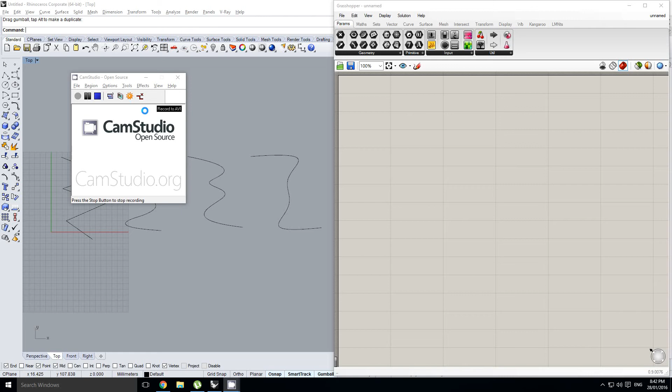Hey guys, this tutorial is going to be a look at some of the fundamental concepts of geometry in Rhino and thus what we have access to in Grasshopper. Now this tutorial will explain things that are good to know if you're using Rhino, so it's not a Grasshopper specific tutorial, but I will be explaining some of it in terms of Grasshopper terminology, so feel free to follow along if you want, otherwise do what you want.

I should also note that you don't necessarily need to do anything in this tutorial. This will be just me explaining some fundamental concepts, so you don't need to actually have your Rhino and Grasshopper open if you don't want to.

Alright, cool. So without further ado, the main type of geometry that you work with in Rhino is called NURBS. And NURBS stands for Non-Uniform Rational Basis Spline, or a B-spline. And so these are just a specific kind of geometry that were discovered in, I don't know, between the 1950s and 1970s, and they're governed by an incredibly complex set of mathematical equations far beyond my head, but we don't need to know all of that to understand how they work. I'm just going to explain to you what you need to know.

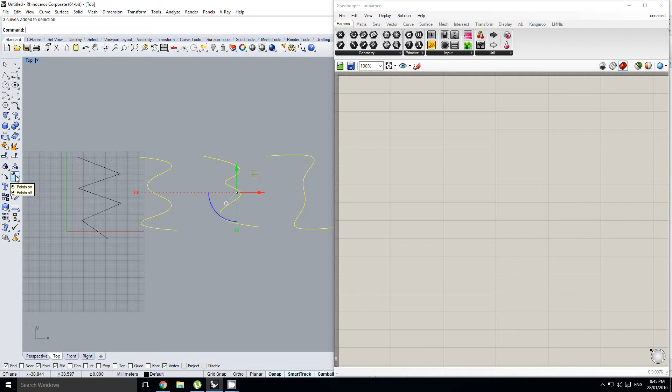And so the degree can be basically any number. Generally you'll get either a degree 1 curve, a degree 2 curve, a degree 3 curve. You can get a 4, although they're not really used that widely, or this one is a degree 5 curve, and so on and so forth. And so if I turn all of these points on using the points on command, okay, so for a degree 1 curve, the way that I like to think about it is if you move this 1 point, it only has 1 point of influence. It won't do anything to any geometry beyond either of these points.

If you're meddling with a degree 2 curve, you'll have 2 sort of degrees of influence. So it'll manipulate any geometry tied to this point and also this one. A degree 3 curve will have 3 degrees of influence. So we're kind of getting influence on this point here, and a tiny bit bleeding into this point here. And then a degree 5 curve has 5 degrees of influence. So from this point to this point to this point to this point.

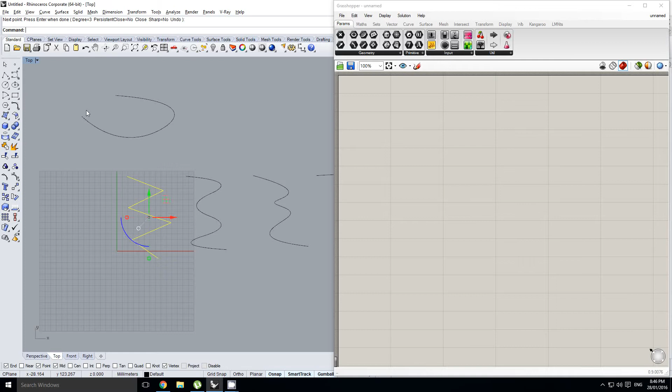And you'll notice that the higher the degree of the curve, the more sort of spaced out your points get, and that's just a factor of calculating a NURBS curve. The other really important thing to note about a NURBS curve, I'm just going to make another curve over here really simply, is there needs to be more points in the curve than the degree of that curve.

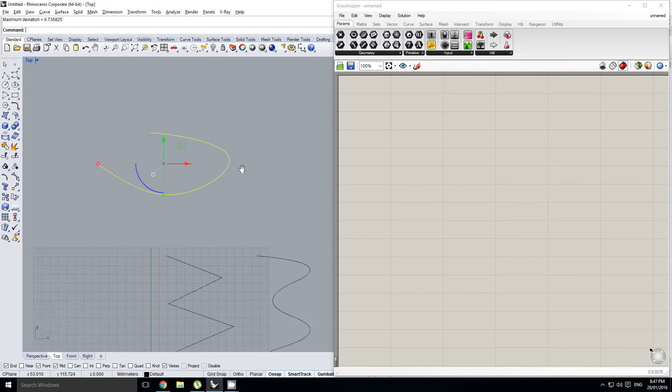So for instance, if I were to rebuild this curve, actually before I do that, I'm gonna cycle through the different degrees so we can see what's going on here. So this is the degree 1 representation of this curve. This is degree 2. This is degree 3. And so at degree 3, we sort of get the most natural shaping of that curve. And in general, degree 3 curves are the best curves to work with. I say best in a very loose sense of the term.

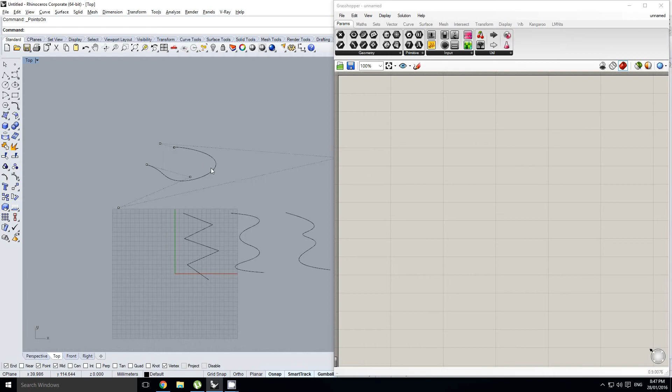Alright, we'll keep going. We'll try degree 4 and degree 5, and we don't really need to go beyond that. So you can see our points are going to get really spaced out. So we'll bring this back, sorry, to degree 3.

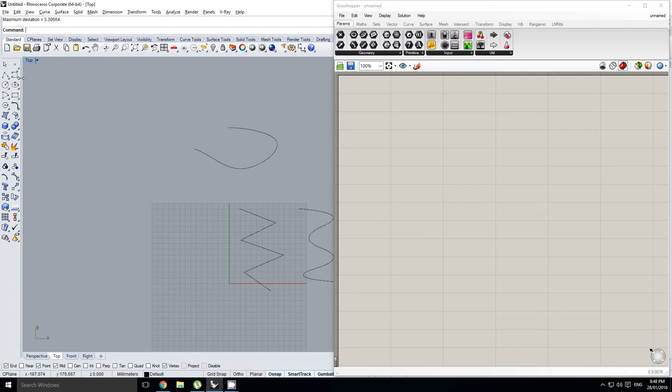Alright, now what else do we need to know about curves? It's really important how you space the control points of your curve out. And so for this we're gonna dive into Grasshopper so I can illustrate this. I'm gonna build a curve with 4 points.

So that's my first curve, and then I'll build another one with maybe a tiny bit of spacing over here, and then a whole lot of spacing in the middle, and then a tiny bit at the end. Then we'll do another curve with huge space between the first and second point, and then really small spaces between the third and fourth point.

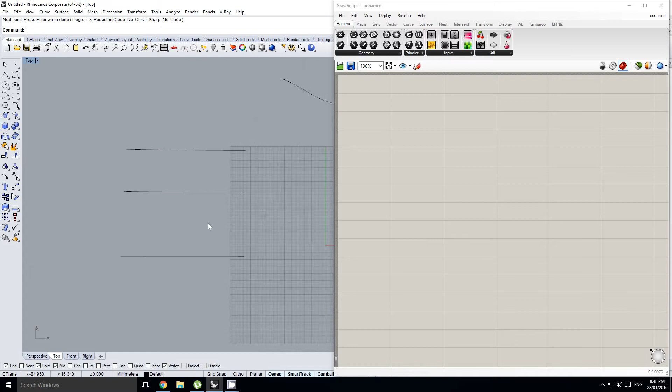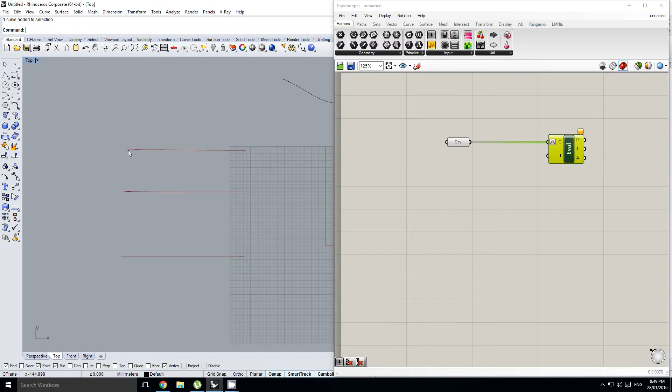Alright, now we're gonna bring these into Grasshopper as pieces of curve geometry, and I'm gonna set multiple curves. So 1, 2, 3. Now, as I evaluate these curves, you're going to notice something. Just remember we reparameterize our curves so that it turns our curve, whatever length it is, into a 0 to 1 space. So that way, if we're evaluating the reparameterized curve at 0, it's always going to be here, and at 1, it's always going to be here.

Alright, so we'll set this back to 0, plug it in. Now watch carefully what happens with this slider. In fact, I'll just turn the control points on so that you can really understand what's going on. Okay. Did you notice that? We get a very interesting result in the way the evaluation works along the curve.

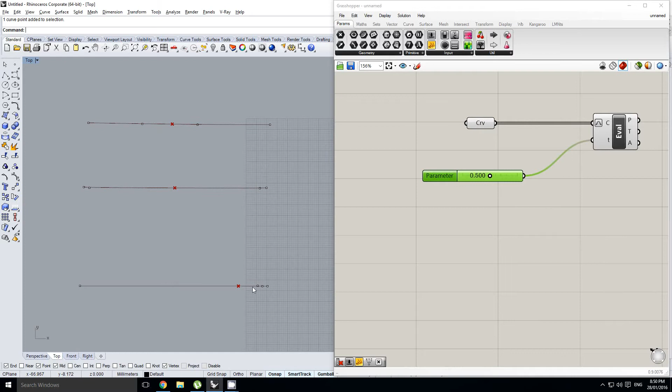Basically, if I'm going to evaluate it at 0.5, basically every single point on the curve has like a weight to it, and so the longer the spaces between the points, the more drawn the evaluation point will be to where there's more points.

So if we were to bring this to 0.25, you'll see our point on this third curve is pulled really far along this curve, whereas along this one it is probably about a quarter of the way along that curve, and along this one it's still dragged, still a bit retarded towards the 2 points at the beginning of the curve.

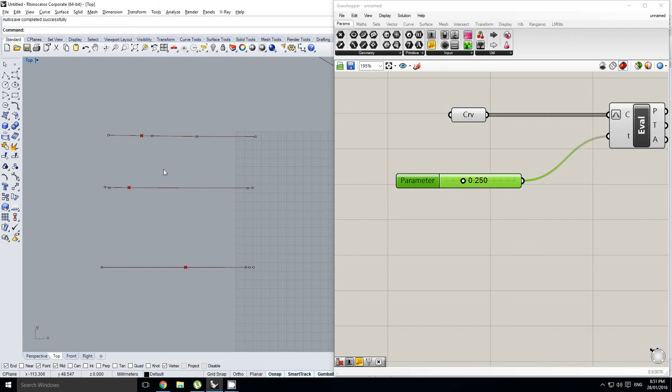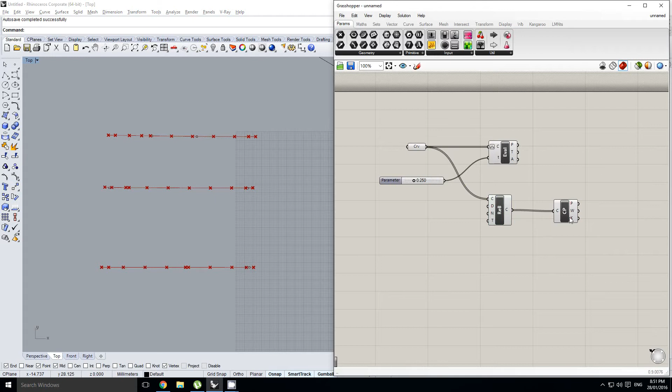Now, if you do bring your curves into Grasshopper like this, it's not too much of an issue because we also have the rebuild curve in Grasshopper too. And so rebuilding a curve before you manipulate it is really, really good to do. Because if we want to now grab the control points of this curve, you can see that Grasshopper's really spread them out a lot nicer.

And so we also have a couple of different parameters that we can control. We can control the degree of the curve, and we can also control the number of points. And if we want, we have some sort of control over the tangents of the curve as well. Alright.

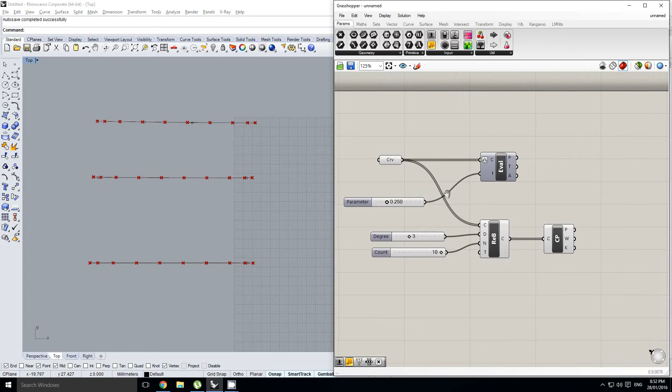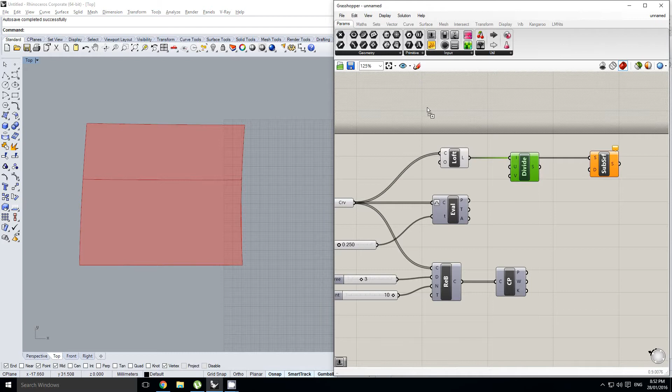So now let's look at what happens if we were to loft these 3 curves together. Okay, now that's alright, but that's not quite what I'm showing you just yet. If we were to take an ISO trim of this surface, and for that I need to use a divide domain squared. Don't worry about what these components are at the moment, that's not too fundamental to what I'm trying to explain.

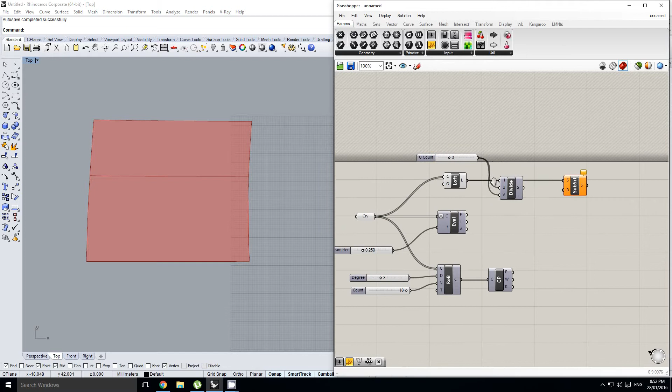Basically, we're going to look at how this surface is going to be divided up if we don't create our points properly. Or maybe you would want to do it like this because you'd want to achieve this sort of effect. Okay, so I'm going to turn the points on again, and you can see once again the point structure is really affecting how our surface is divided.

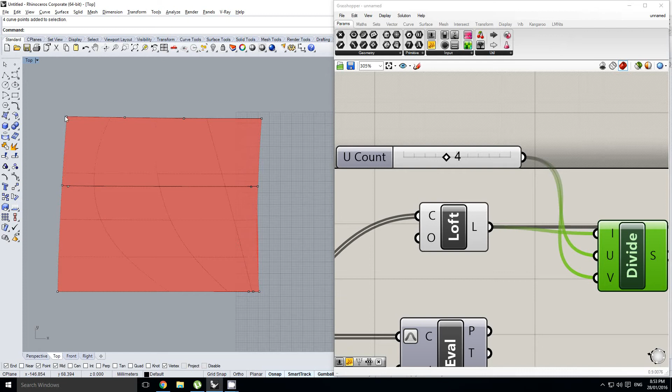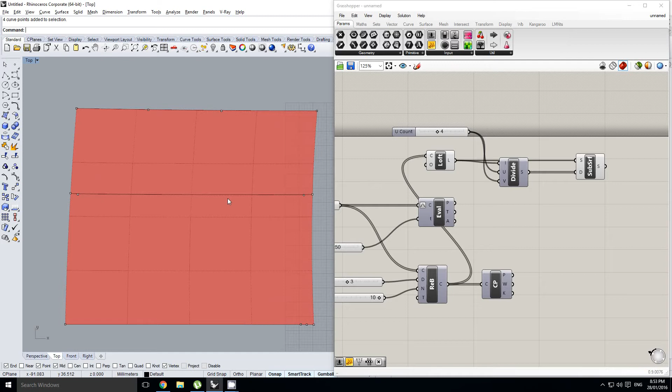It's really skewing the points towards these 3 points here on the third curve, and we're getting some really weird spans along here in the second curve, whereas in the first curve we're getting really nice spans between our 4 points. So if we were to put these rebuilt curves into the loft, you'll see what we get are really nice spans across our entire curve, because we've rebuilt the curves so that Grasshopper will now deal with them in a much nicer way.

Alright, so just like how curves have a degree value, surfaces also have a degree value, because surfaces are NURBS geometry too. So we're going to create a sphere.

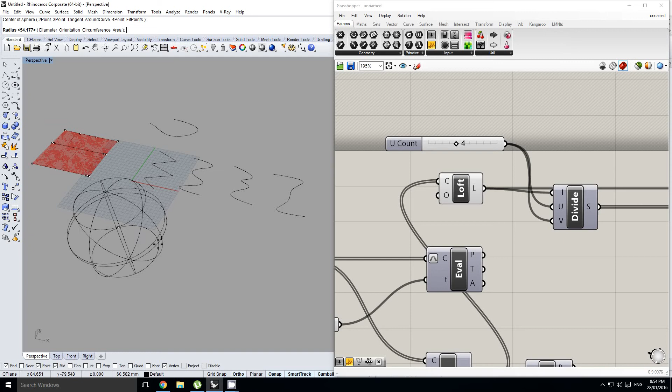I'll just drop that down. Okay, and so by default, the sphere is going to have a degree value of 2. But what you also notice is that it has a degree value in each direction, because a surface has a u direction and a v direction. And so by default it's set to 2. Oh, sorry, let me just undo that.

And we're going to make 2 copies of this. One there, and one there. And now we're going to rebuild this one, and we'll set it to degree 1. We'll rebuild this one, and we'll just leave it at degree 2, but we've changed the point count, so I just want to keep that consistent along all of my surfaces. And we're going to rebuild this one, and we'll make it degree 3.

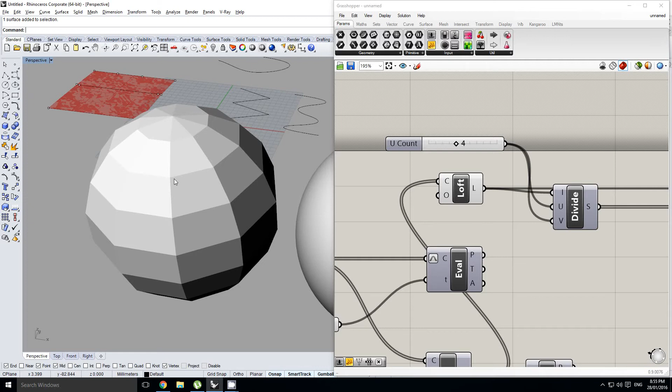Alright, so you might look at this and think, oh, that looks like a polysurface because it's composed of multiple different panels. Well, no, it's not actually. It's still a surface. And the way we can tell is because as soon as we select it, it tells us it's a surface. I'm going to explain the difference between polysurfaces and surfaces in a little bit more time. Alright, so degree 1 is always going to create this sort of faceted look. You saw the same thing with our curve, because each of these points have basically only 1 degree of influence, as I called it.

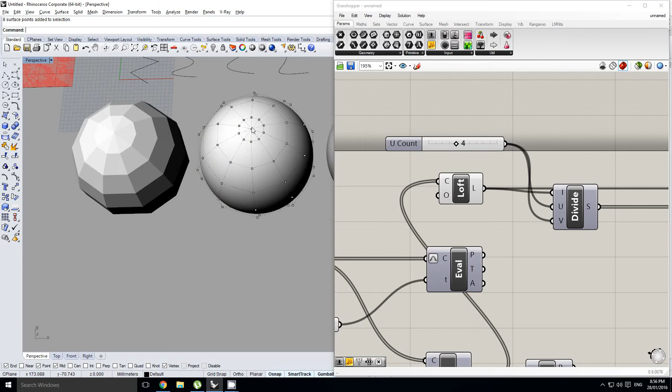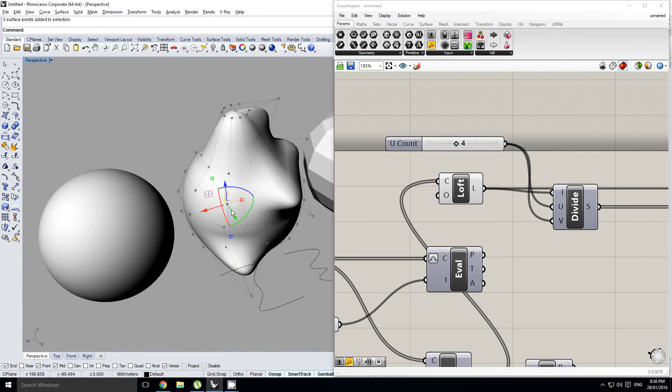Okay, so now if we were to take this sphere and we were to grab a whole row of points, in fact, let me just deselect those because I don't want those ones, and then we were to drag this out. Actually, hold on, let me just check what happened with that. Okay, so if I were to turn points on again, and let's see what happens if I just grab these. Okay, sorry, never mind, I just got a bit distracted there. Sorry, and I undid that rebuild.

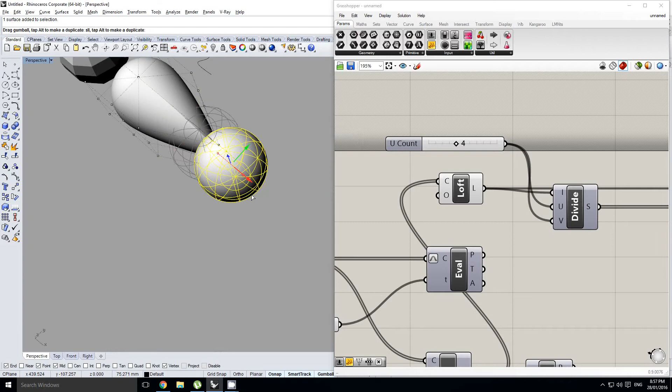Okay, so with this degree 2 surface, if we were to start pulling on some of these points, you might notice something, and that's that it gives us this really weird sort of harder edge, which is a result of the fact that it's a degree 2 surface. It's just going to do something a tiny bit weird, which is totally cool. In fact, if that's what you're going for, that's all good.

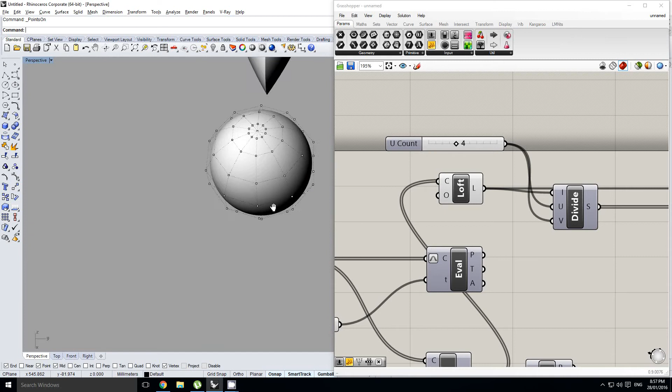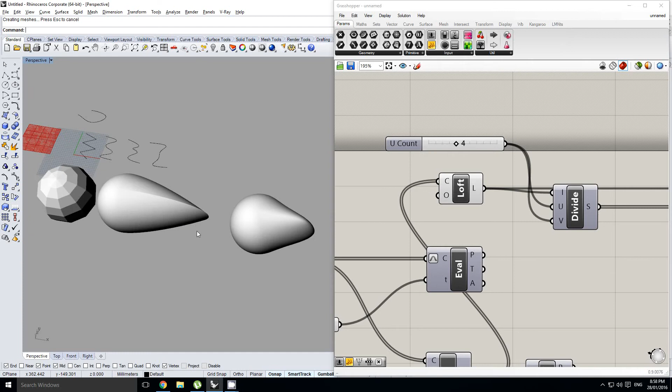But if we were to do the same thing with this degree 3 surface, let me just deselect those points and select these. Your degree 3 surface is always going to remain 100% continuous and clean and really nice. And this is once again because of the way we deal with curvature of geometry and the way that NURBS are constructed. Your degree 3 surfaces and curves are always going to look the most natural, be the smoothest, and just all in all the nicest to work with. Alright, cool. So I'll just undo all of that.

Okay, so now if we bring these surfaces into Grasshopper, actually I'll just bring them all in separately. Okay, so now we're going to use an Evaluate Surface component. I'm going to plug my surface in, and I'll do that 3 different times, and then I'll just use one multi-dimensional slider. Oops, and I forgot to reparameterize these. So we can, in fact, evaluate all of these surfaces along any point, or along any parameter along that surface.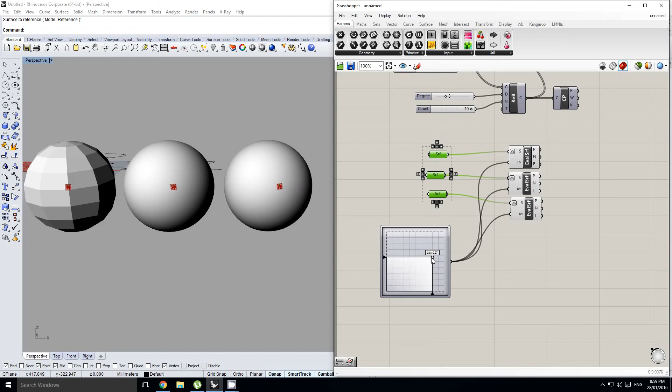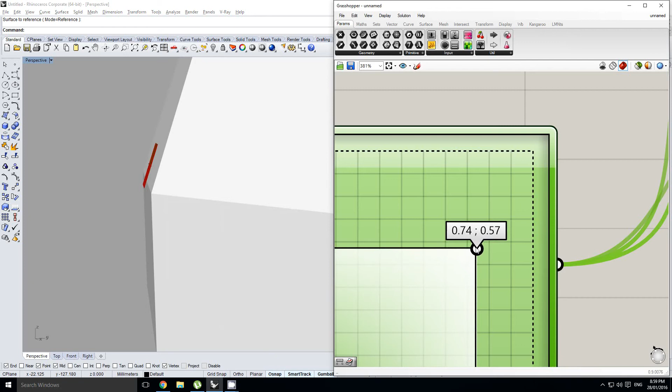You'll notice that as we sort of shift along the bounds of this one, it is going to give us very hard changes in the direction. So it's a very abrupt change along that edge, but it's still a surface, and all of these surfaces are going to give us nice smooth results as we pan around them. Now, just to explain something, I'm going to divide the surface using a Divide Domain Squared. In fact, did I? Yes, I've still got this here.

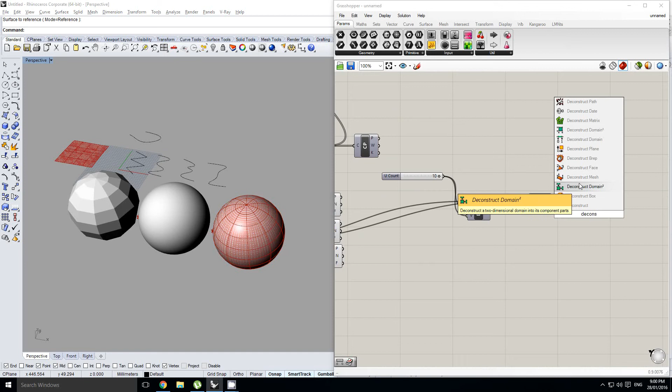I'll just make a copy of this, and I'm going to evaluate this surface. Oh, no, not evaluate it. I'm going to divide it into 10 chunks, and then I'm just going to deconstruct that object, or those objects, and it's going to give me a list of vertices. And so I'm just going to get a list item, plug that in, and I'll get my 4 points out,

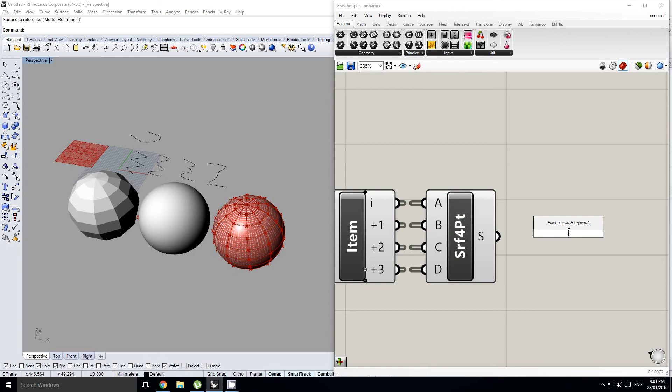and then I'm going to create a 4-point surface, using 1 point, 2 point, 3 point, and 4 points. And then we're just going to use a brep join component, flatten that. Okay, you might be wondering why I did this, and you'll see why in a sec.

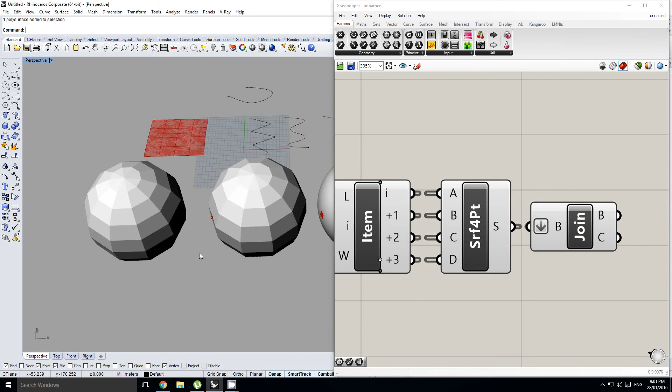Okay, so this is a surface, and this is a poly surface. Now, what's the difference between those? Well, you might think they look exactly the same. I guess they kind of do. But there's a fundamental difference between these. Okay, this is the degree 1 surface, right? We can evaluate that surface, as we saw, at any which point on that surface that we want. It will give us abrupt changes between these sort of facets, but nonetheless, it is still a surface.

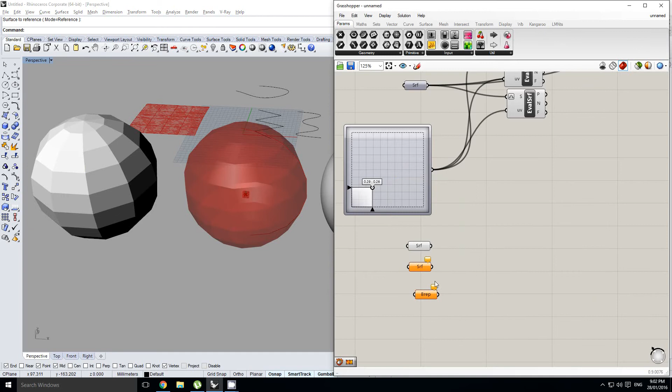Now, if I try to bring this in as a surface, it's not going to let me. It's just going to throw a null. So if I try to set this again, nope, still not working. Even if we were able to bring this into Grasshopper as a brep, which is what Grasshopper calls a polysurface, we're going to set this brep and then preview that off.

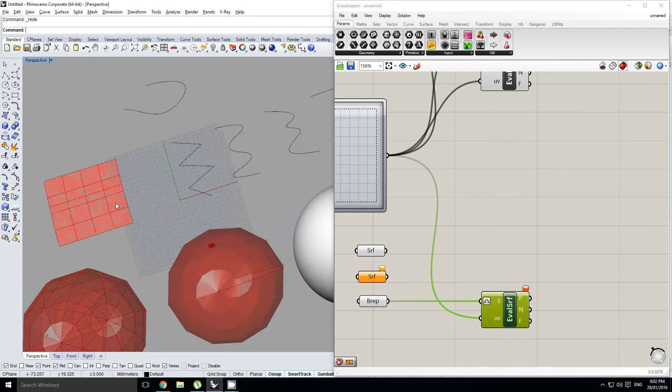If we were to now try and evaluate that surface, you'll see Grasshopper won't let us, because a brep is different to a surface. A brep does not have everything constructed in this sort of 0 to 1 space that we have of just a normal surface. It's constructed of multiple different surfaces, and so we lose all that information about the domain of the object as a whole.

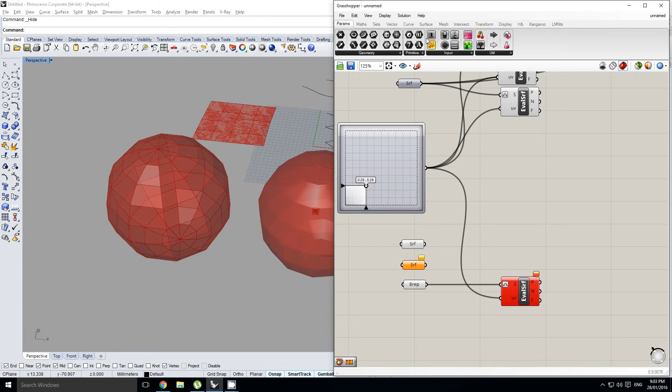And so in general, when you're working in Grasshopper, you want to try and work with surfaces more than breps, because that allows you to work with a lot more of these functions. Basically, any of these functions that even say brep or surface will work with a surface, but not everything that says surface will work with a brep, because a brep is sort of a level higher of geometry.

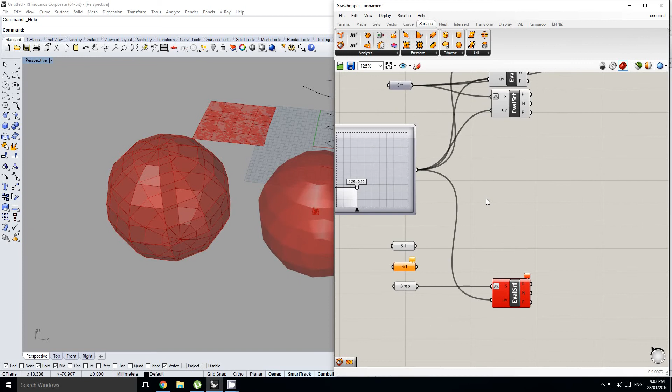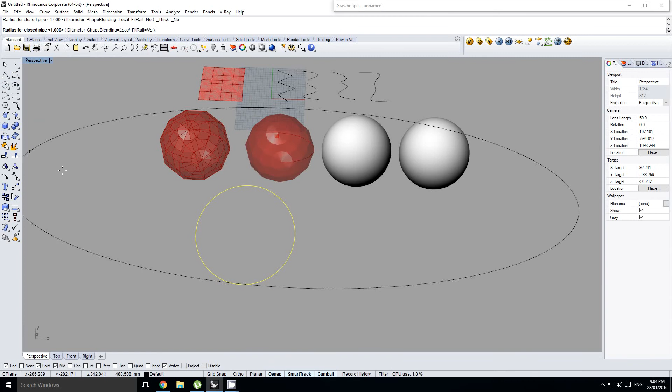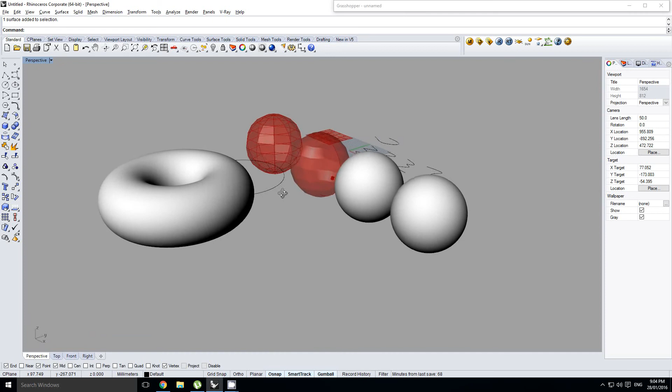Alright, now one other thing that we need to talk about in terms of surfaces is what's called the genus of the surface. What this is, okay, I'm just going to make a circle here, and then I am going to make a pipe around it. Okay, so this is a surface, and this is a surface. And the genus is basically the number of holes that object has. And so a NURBS piece of geometry can only have either a genus of 0 or 1.

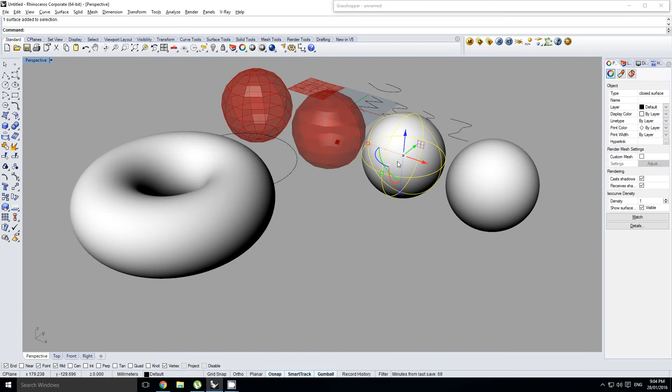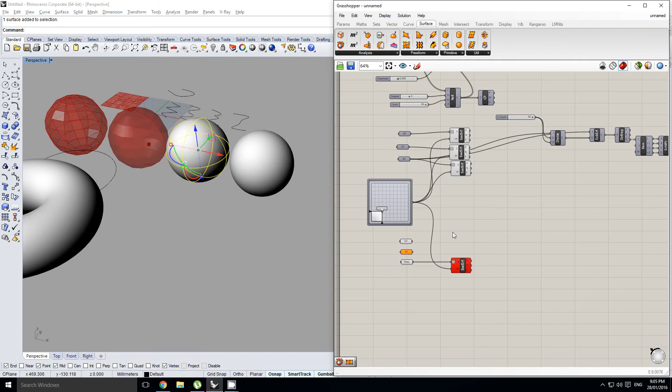What else do we need to talk about? Yes. Actually no, we'll just leave that, it's not too important. The last piece of geometry we're going to cover is a mesh. So a mesh is quite different to a NURBS surface or a poly surface. Let's create a mesh sphere. Oops, let me just go and find it. A mesh sphere.

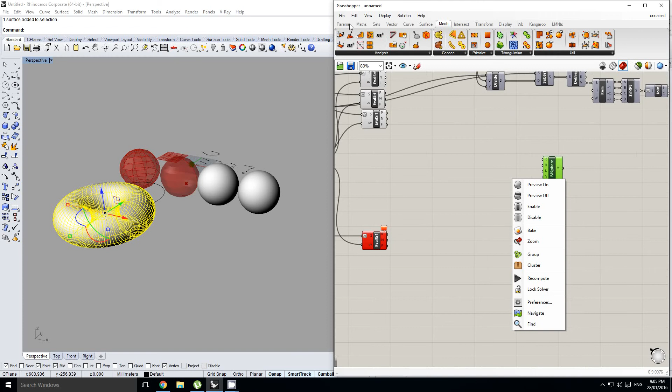I'll just set this radius to 100 or so, plug that into my radius, and we also need a number of U and V spans.

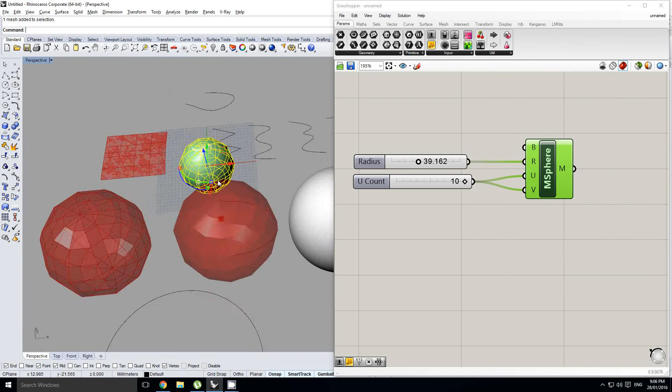Alright, so this is my mesh, and so if I just turn these all objects on, we're going to show selected. I want to show these two, and then we're going to go into shaded mode. So you might look at these and think that

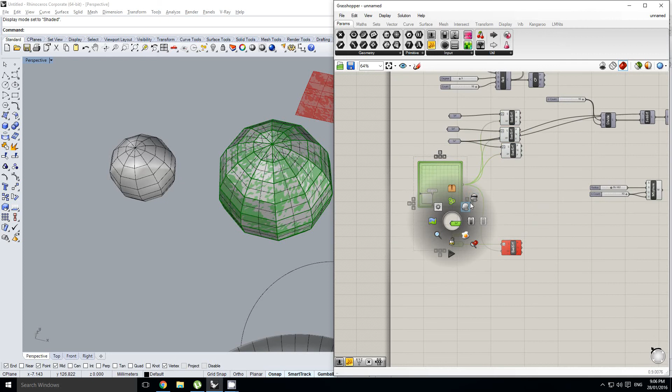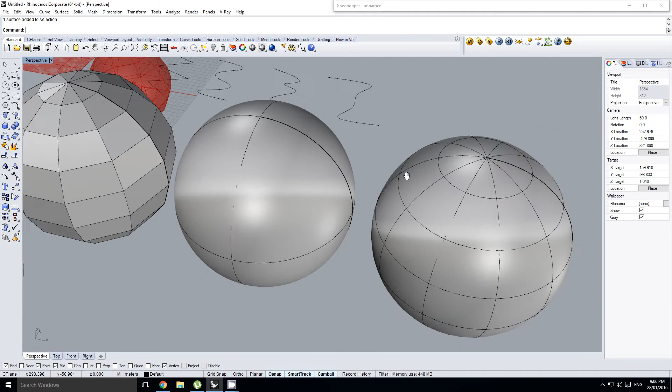these look like similar constructions of geometry, but a mesh is quite different to a NURBS surface, because a NURBS surface, if it's anything more than degree 1, will be continuous at any point on that surface. So it has no discontinuities. Whereas a mesh, no matter how smooth, is always going to be made up of essentially polylines. Not quite polylines, but that's what it looks like to us.

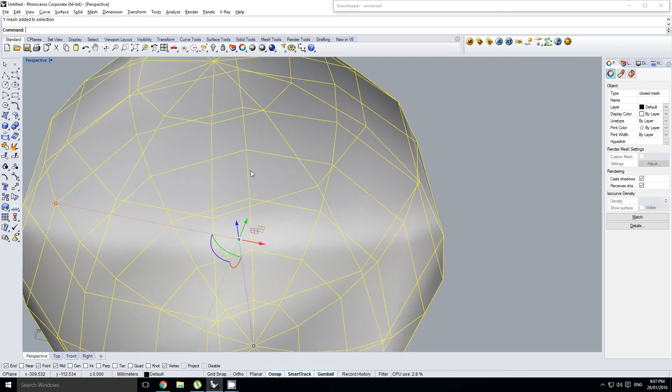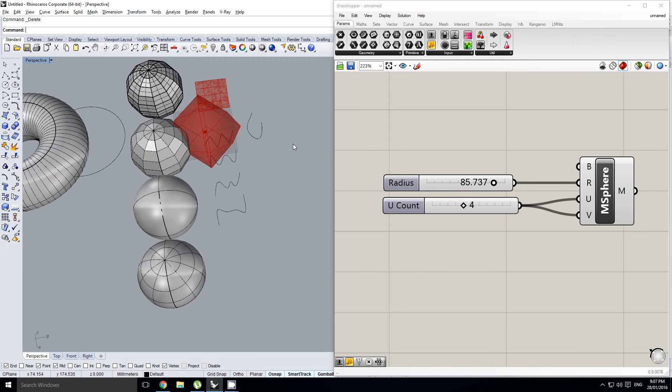Every single edge on a mesh is completely straight. And that's quite an important difference. So the way we work with meshes is, well, actually there's some really interesting ways that we can work with meshes. I don't know if we're quite going to have time to go into that for this tutorial, but let's say that I've got a mesh like this, which looks very, very boxy.

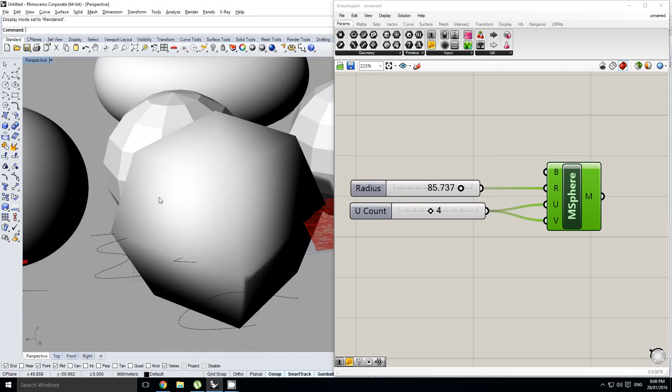If I go into rendered mode and then just preview that off, the mesh geometry does something really interesting in terms of how it shades itself, in that it gets light information per vertex, I guess, and so that information kind of bleeds over onto neighboring faces, which is why we're getting this really weird sort of black perimeter shadow around this shape.

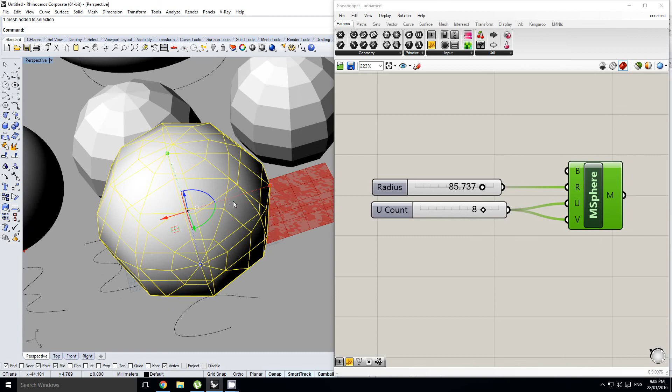If we want to get rid of that, we need to increase the count on our number of faces, and the higher our count, the smoother our object is going to look, and hence the less of this sort of black shading you're going to get on the peripheral.

And so what's really important to understand about a difference between meshes and surfaces is that meshes have this sort of resolution factor, where the smoother your mesh is, the higher resolution it is, and I guess the better your shading will look, if that's what you're going for.

NURBS, to an extent, also have this idea of resolution, but that's to do with scale. So the larger your NURBS surface is, the more resolution it's going to have, because Rhino needs to calculate every single point on that surface according to the accuracy of Rhino you're working with.

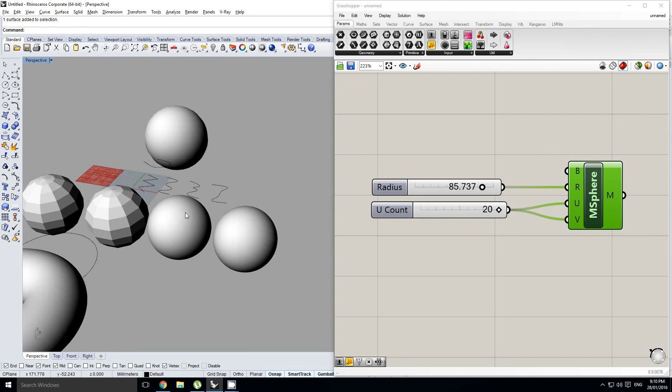So this sphere that I'm working with now is only maybe 100 millimeters in diameter, but if I were working with that at 100,000 millimeters in diameter, it could cause my Rhino to lag quite a bit, and so we need to be aware of that when we're working with scale and NURBS geometry.

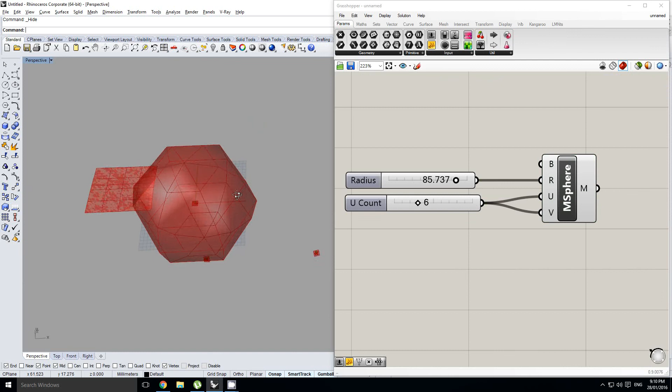Alright, so now the final thing I'm going to talk about real briefly is this idea of subdivision modeling. I'm going to hide all of this. So a really popular way to work with meshes that's been developed for a lot of other programs, you don't really use it so much in Rhino, is this idea of subdivision modeling, where you basically construct really primitive looking geometry, and then you subdivide it to get a much smoother result.

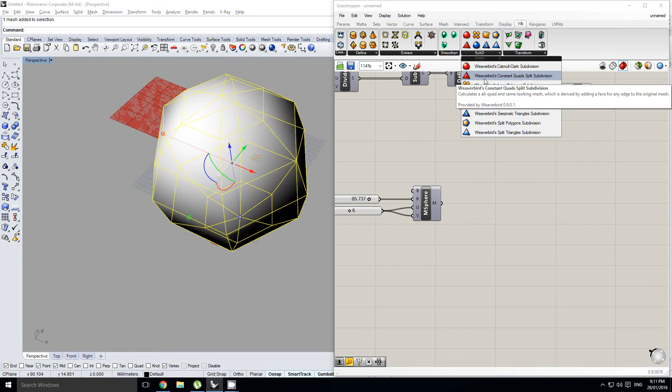And so in order to do that, if you don't have it yet, you should get this plugin for Grasshopper called Weaverbird. It has different kinds of subdivision methods, and we're going to use this Catmull-Clark subdivision method. And so what this does is it tries to smoothen out the geometry as much as possible.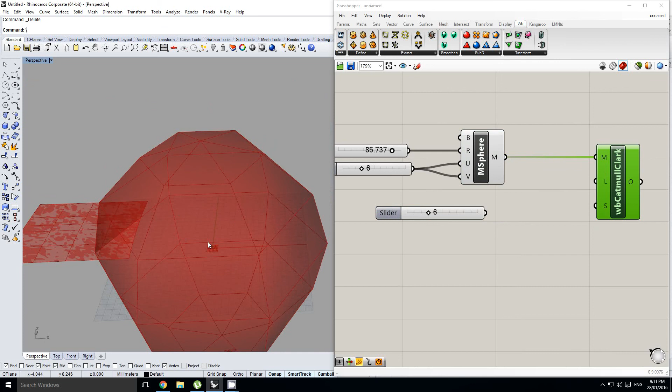Or not as much as possible, it takes the initial edges of the surface and looks halfway between each and every edge, and then deconstructs that face into 4 smaller faces, which are a lot smoother. Well, not a lot smoother, but they result in a smoother look overall.

And so for this Weaverbird plugin for smoothing geometry, we can go up to 3 iterations by standard, and that'll give us a really nice smooth looking mesh to work with. And so you might not even be able to tell the difference between that and a NURBS surface, but the way you can obviously tell is just by looking at what Rhino tells you it is in the viewport, or what Grasshopper tells you it is on the output.

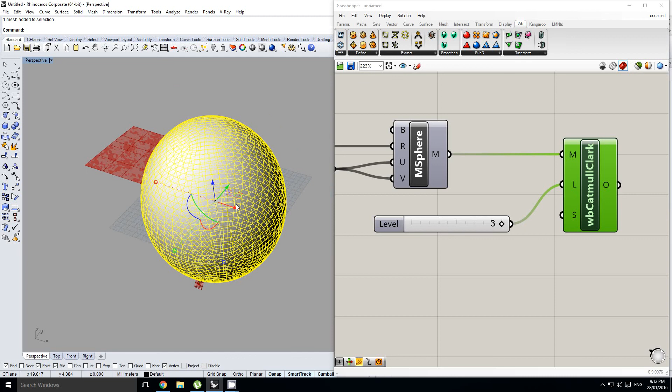Alright, so that was probably a really basic rundown of meshes, whereas we went into a bit more detail on different kinds of surfaces, the degree of surfaces, the degree of curves, and the genus, as well as various other things.